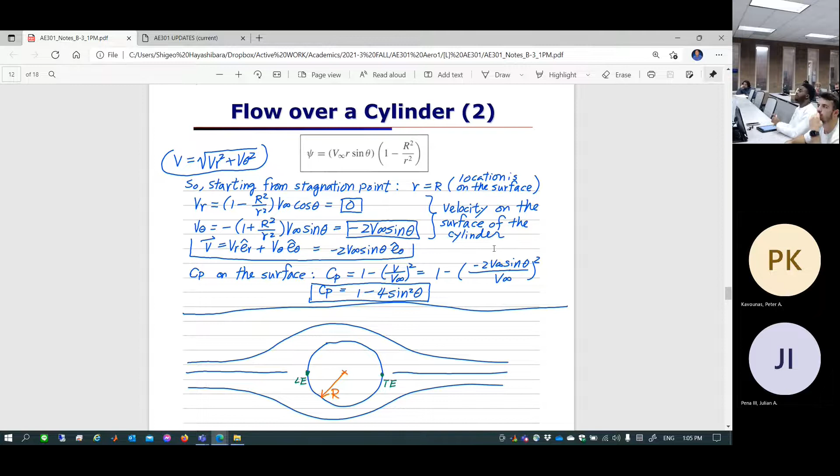So anyway, where did I stop in last class? I think we looked at flow over a circular cylinder without having any circulation in it. So this is non-lifting flow over a circular cylinder. Let me just put the memo here. Sorry, I forgot to connect my drawing tab. So this is something called non-lifting flow over a cylinder.

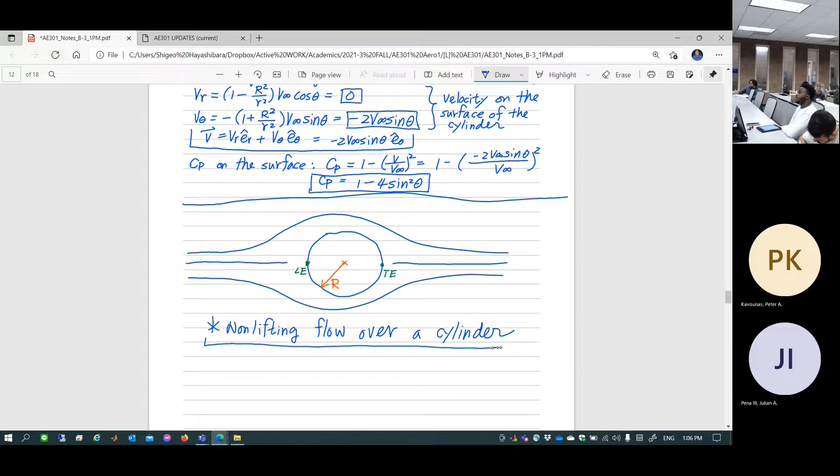Why is this non-lifting, by the way? Somebody please give me a straight answer. This one doesn't have lift at all. Why? No circulation, you're saying? Oh, that's great, actually a very good description of why you don't have lift, because you have no circulation in the flow field. There's no mechanism of creating any circulation in the flow field. Would it also be accurate to say that when you integrate the pressure distribution over the surface, it's equal to zero, because the pressure distribution in a certain direction is completely symmetric? Yeah, you can say that too. And then you can say that because we have no circulation, we have such a pressure distribution.

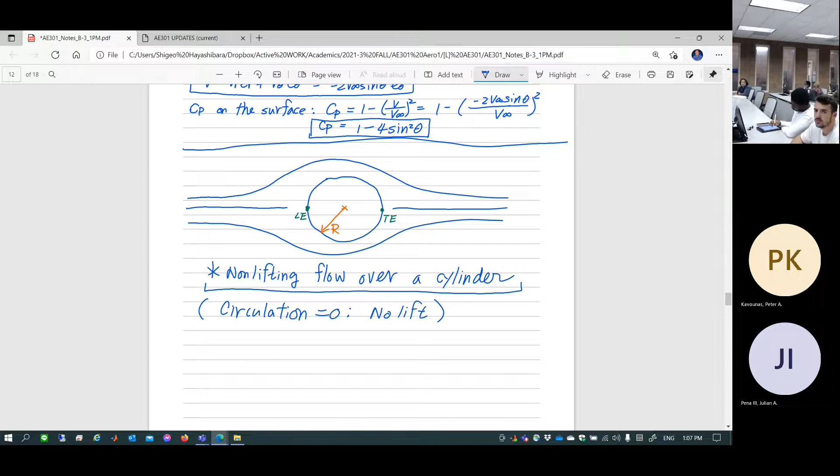So this is actually the very first fundamental idea of the theory of aerodynamics, circulation theory. Circulation is zero, no lift. You can apply this theory exactly as it is to the flow over a cross-section of a wing. It's called the circulation theory of aerodynamics, of German origin. Prandtl, Ludwig Prandtl, is the one who actually developed this whole thing. So we are going to refer more and more to his name, and lots of things called Prandtl's fluid mechanics or fluid mechanics theory developed by Prandtl. This is Prandtl theory of aerodynamics, a very classic theory, which this country actually accepted right after World War II.

Aerodynamics in this country, the United States, is based on German theory. Interesting, and then Japanese professors teaching that. Interesting, isn't it? How come you shouldn't say this? No more bad jokes.

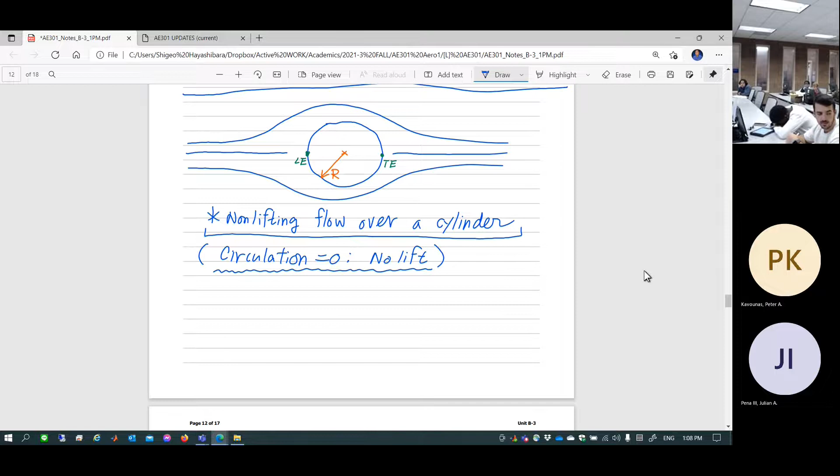Are there opposing commonly accepted theories for wing lift, say? Some people actually pick up Newton's impact, like a third law of motion, Newton's action-reaction kind of theory. Occasionally they do, we don't. However, circulation comes down to being the similarly commonly accepted theory for lift worldwide, so some details will be different. But we adopt almost as-is the Prandtl theory.

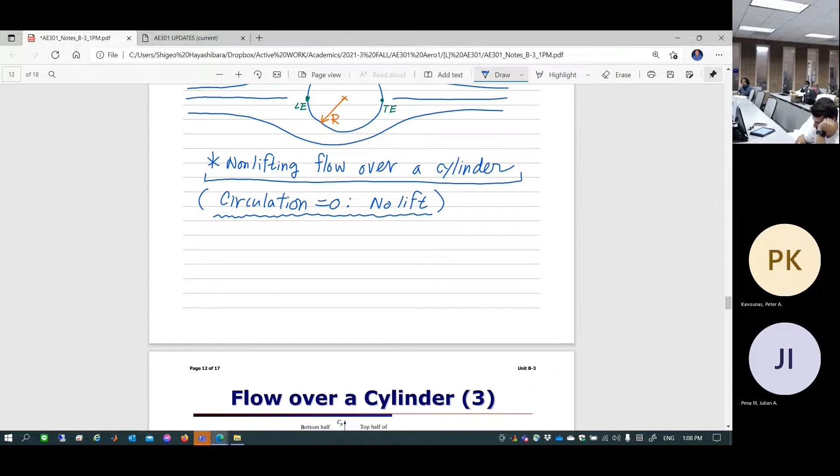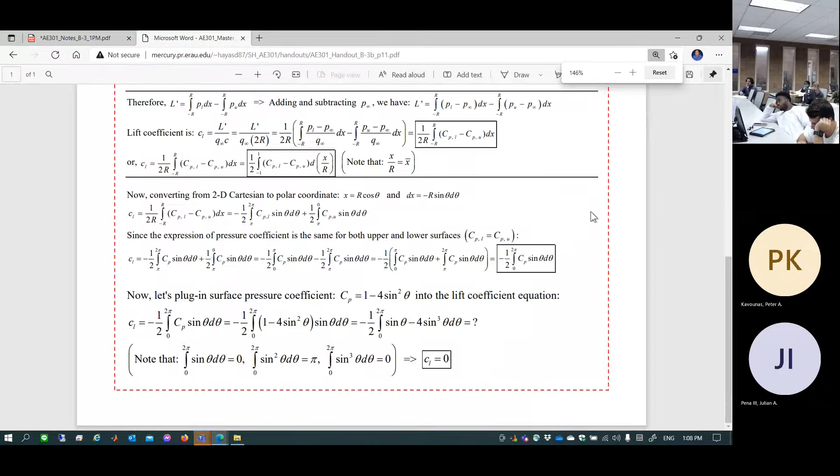So now, remember last class we introduced a handout, quite an important handout. Basically lots of people probably ignore this handout, I know that, that's why I'm telling you right now. This handout's contents may all of a sudden show up on the final exam, be ready for it if so. So this is quite important mathematical detail, I want you to go over it. So if there's no flow circulation in the flow field, this is the pressure coefficient distribution over the surface of the non-lifting flow of the circular cylinder.

Is that correct? Non-lifting means circulation is zero, flow over a circular cylinder.

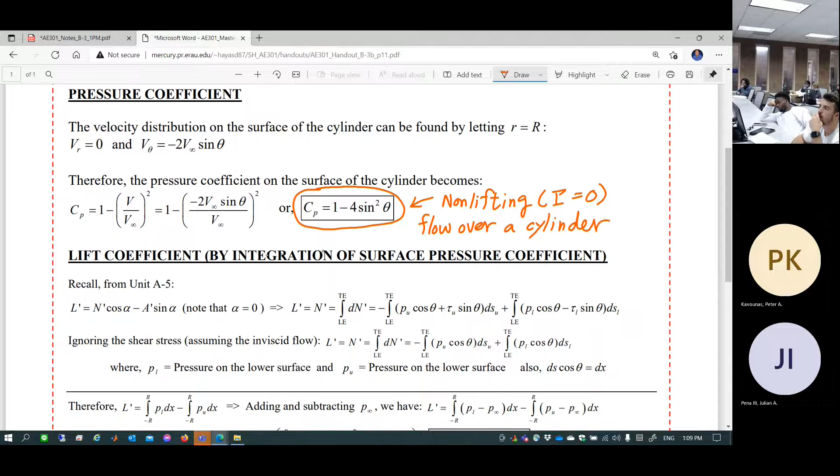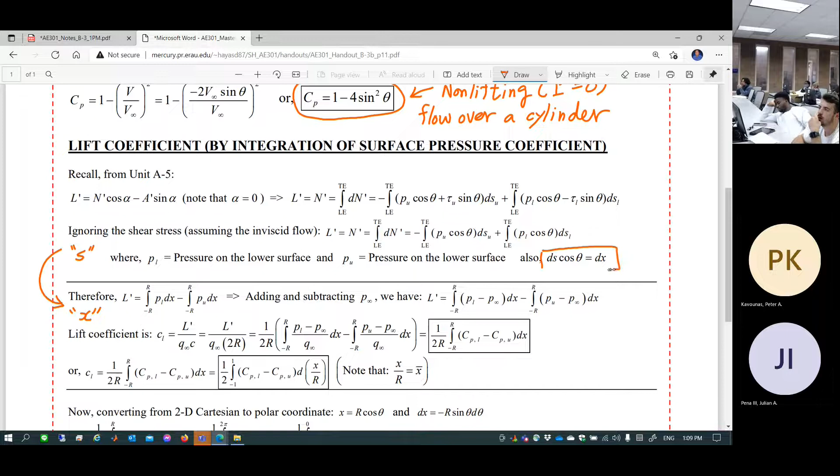Then, of course, you went through twice the coordinate transformation process. This is the coordinate transformation, streamline coordinate S into the Cartesian coordinate X using coordinate transformation. Then you come up with the CL lift coefficient equation, which can be given by integration from leading edge to trailing edge of the CP distribution difference between top and bottom surface, which gives you lift. Of course, if you do the CP distribution difference between forward and backward surface, you can determine the drag.

So this is only the lift coefficient, but you can, of course, compute the drag coefficient also. With the same token, you can determine the pitching moment, say pitching moment at the center of the cylinder, which is half chord, is of course zero. You can compute CL, CD, CM at any location along the chord.

Now chord in this case is of course 2 times radius, right? So this is leading edge and trailing edge. This is radius, so the chord, I keep saying chord C, chord C is equal to 2 times R. This is diameter. Now you can compare against actual cross-section of a wing. Oftentimes we refer to the leading edge and trailing edge, and then connect up the straight line. This is called chord length, right? This is a chord. In this case, chord is 2 times radius, because we are using radius as a normalization factor of x.

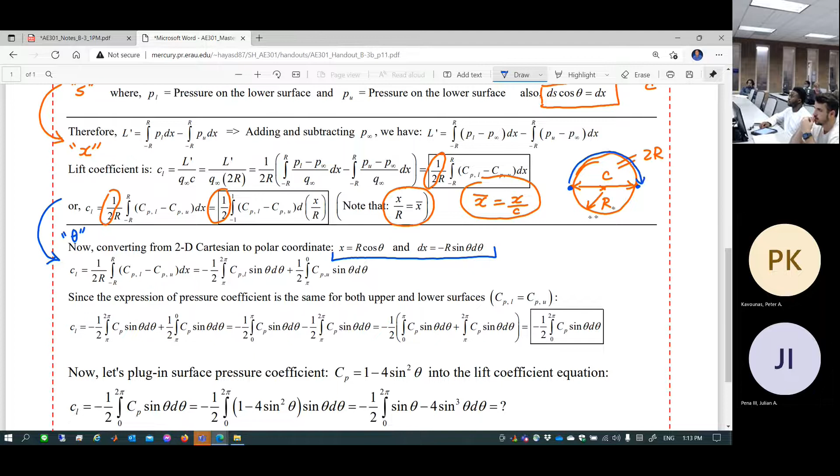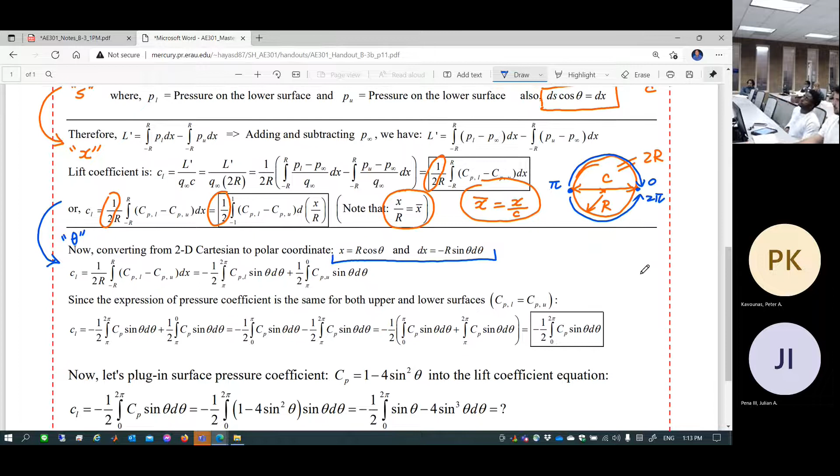That's quite important. So next step is, of course, the second time transformation of the coordinate. Now you're going to transform Cartesian x into theta, which is polar coordinate, using this as a transformation equation. Then you are going to integrate from leading edge to trailing edge for upper surface and lower surface. Theta equal to, this is pi, theta equal to 0, this is 2 pi, right? So you are going to integrate lower surface and upper surface, take a difference between the CP distribution. Now CP distribution is this, a function of theta, okay? So you can finish up your integral, go through this mathematical operation, and the result is CL is 0.

That's what we did. Okay, so we're going to move on from this page forward. Any questions so far? This is just mathematical detail, quite important, to compute actually the lift coefficient using the distribution of surface pressure, okay? Because when you start using your software, this is exactly what the software does. Software computes the surface pressure CP distribution from leading edge to trailing edge and product. And then next thing is you're going to integrate over upper and lower surface to determine lift coefficient out of it. Okay, this is the exact same process, mathematical details.

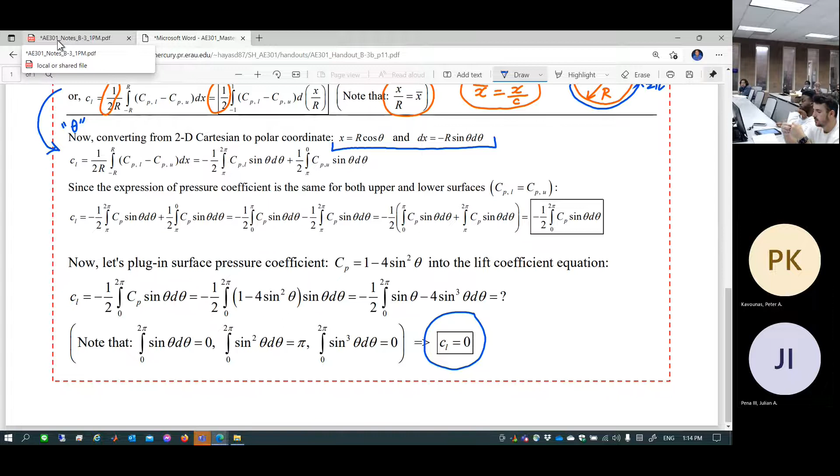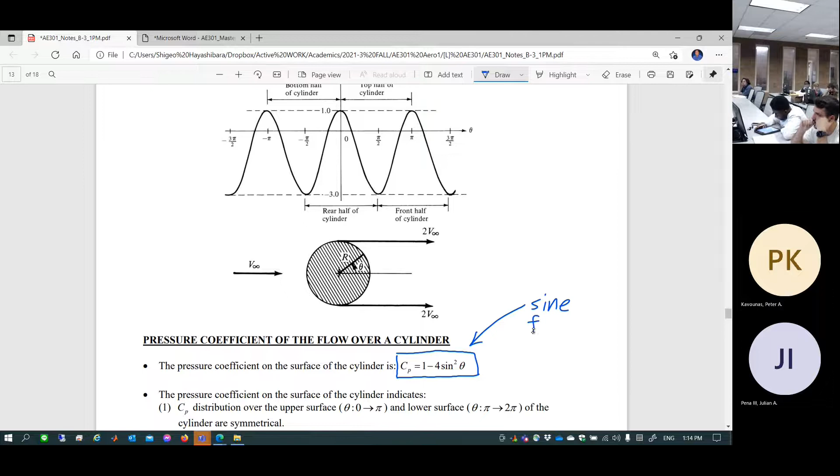So moving on to the next page. Okay, so let's just take a close look at the meaning of this CP distribution of the non-lifting flow over the surface of the circular cylinder. So this is, interestingly, a sine function, right? This is a pure function of theta, of course. And then you're talking about the CP distribution over the surface.

So suppose if you plot theta starting from here, theta equal to 0. This is theta equal to 0. And then let's trace out what is the CP distribution over the upper surface. Theta 0 all the way to, let's say, pi. Theta equal to 0, theta equal to pi. This actually traces out the upper surface pressure distribution. So you're looking at right here. So theta equal to 0, CP is 1, right? And then you're going to trace out all the way to pi.

Here, yeah, so this is theta equal to pi. So theta equal to pi, you're going to have another CP equal to 1 location. So this is a stagnation point.

It's a stagnation point. And then halfway through here, this is theta equal to half pi. CP equal to, oh, looks like minus 3. At this location, surface velocity is maximum value, 2 times original V infinity incoming.

So this is velocity zero location. Velocity is decreasing. Velocity zero. Velocity actually starts increasing at the same time.

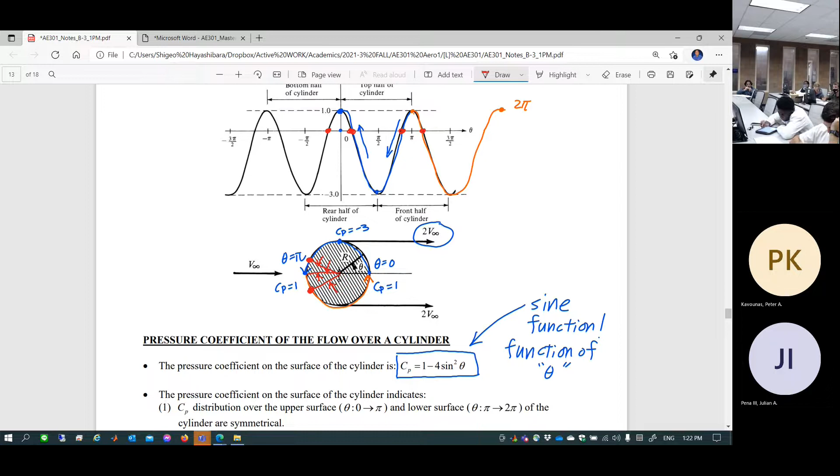So again, if you take a look at surface pressure distributions, you can basically tell the pressure distribution on upper and lower surface, forward and backward surface, are completely symmetric. So it's impossible to create a lift or drag, okay?

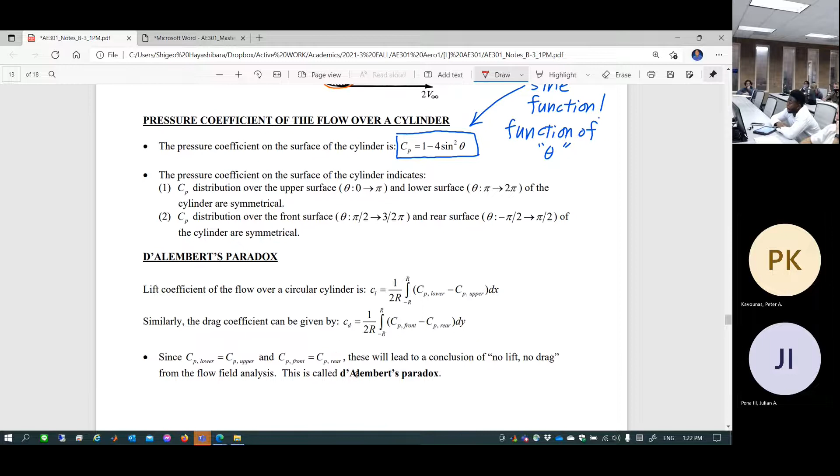So this is called non-lifting flow over the circular cylinder, d'Alembert's paradox. Because people don't believe you saying this flow doesn't create even drag. Why is that? Because we are completely ignoring some physical phenomena, physics out of it.

This is ideal flow. In ideal flow, you include assumptions such as viscosity is 0, density is constant, this is steady flow, zero gravity, and even irrotational in a mathematical sense. So from those assumptions, this is the solution.

Is this a completely wrong solution? No. It just doesn't include some of the physics that actually produce the drag. So if you understand that physics, you can compute it in a separate system or software, attach that result onto this one, and then you can actually reproduce something more meaningful - a real flow field.

That's the approach of aerodynamic theory. Without theory, you cannot predict anything, right? So some kind of prediction is a baseline solution, but the baseline solution oftentimes ignores some of the physics.

So in this flow regime, you can no longer assume density is constant - that means more than 0.3 Mach number. So let's just compute the density as a variable, and then superimpose that result into this original baseline solution. That is going to produce a simulation of high-speed flow.

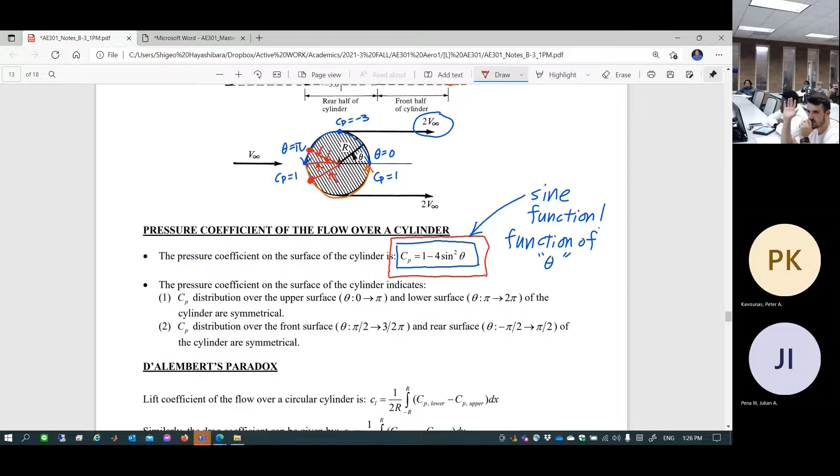Okay, so anyways, question - go ahead, can you scroll up a little bit on that diagram? How come you have V infinity coming in, but 2V infinity coming out of the top and bottom? You can compute that using math. You did it, actually, by the way - didn't you do that? Look at this.

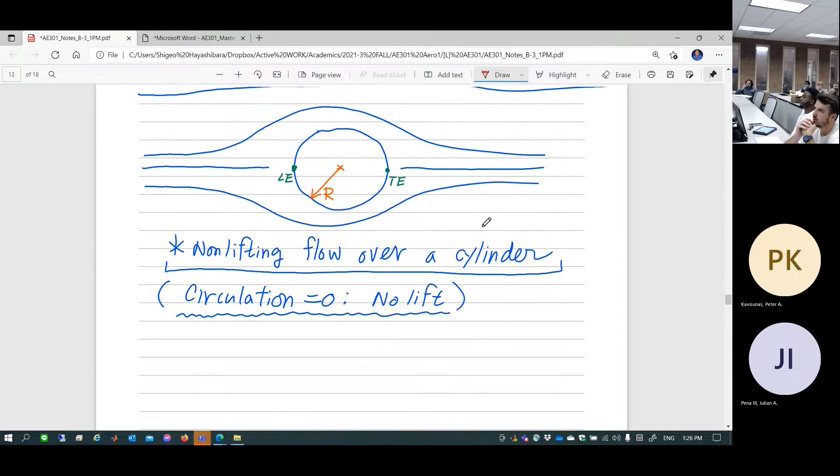Suppose you plug in sine equal to half pi, it's going to be 1, right? Minus 2 times V, okay, that's what you get. Well, actually, minus sine pi - what's that? Minus 1, is it? Something like that. So you get 2 times V infinity sine, 2 times V infinity.

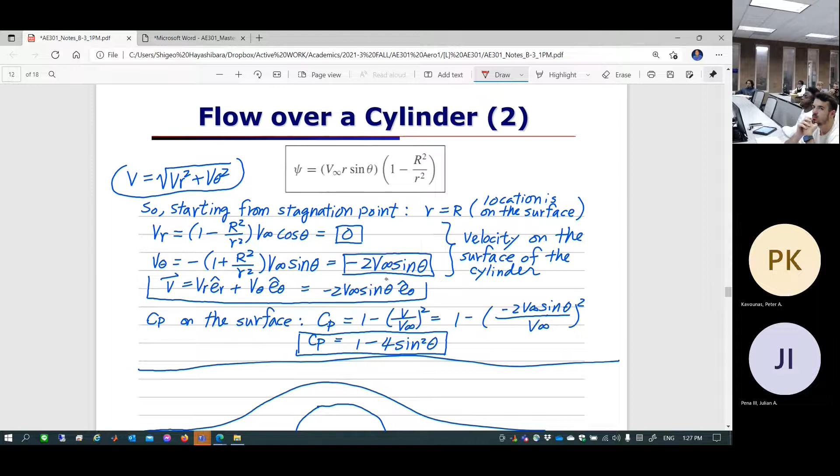Use this equation, you can determine the velocity on the surface - a mathematical solution, you get it. Anything else? You can determine any velocity at any location, it's a function of theta, right? It's 100% math, that's what we are doing. Any other question?

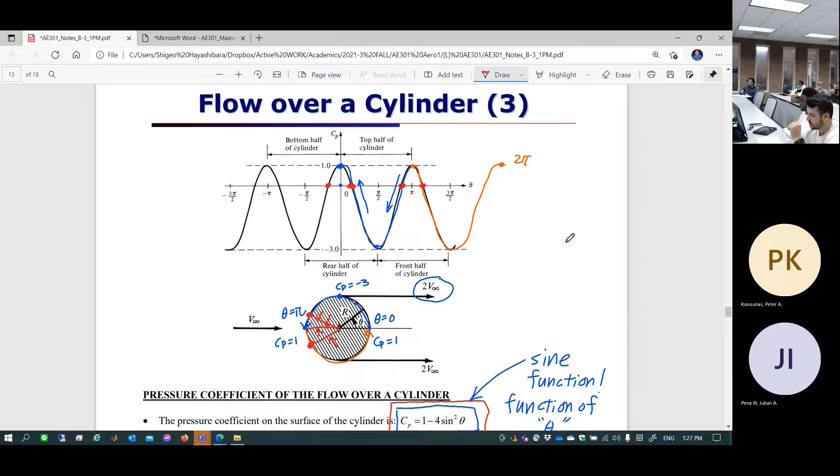Okay, good. So this is the question. Consider the flow over a cylinder, over the surface of the cylinder, and calculate the locations where the surface static pressure becomes equal to the free stream static pressure. What kind of location is that?

What kind of location do we call this? If we make a drill hole, what kind of location is that? This is static port. It's not, it has nothing to do with statics class, okay? Please.

P goes to P infinity. So surface pressure P, actually Cp, is a function of theta. We know Cp is 1 minus 4 sine squared theta. Is that right? Cp as original definition is P minus P infinity over Q infinity, isn't it? Right. So if P becomes P infinity, Cp equals 0 here.

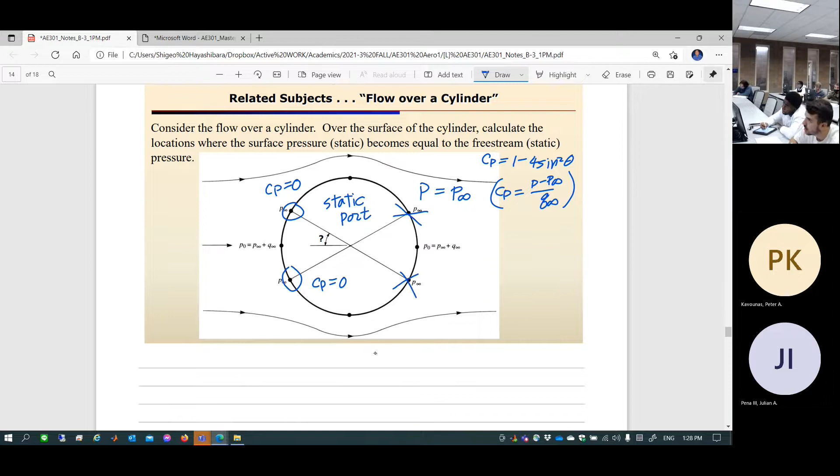Now this is the other side of the flow field, so this is forward surface, backward surface. These locations, mathematically you can find it, but realistically we cannot use it. We can only use the forward surface. So let's just find out.

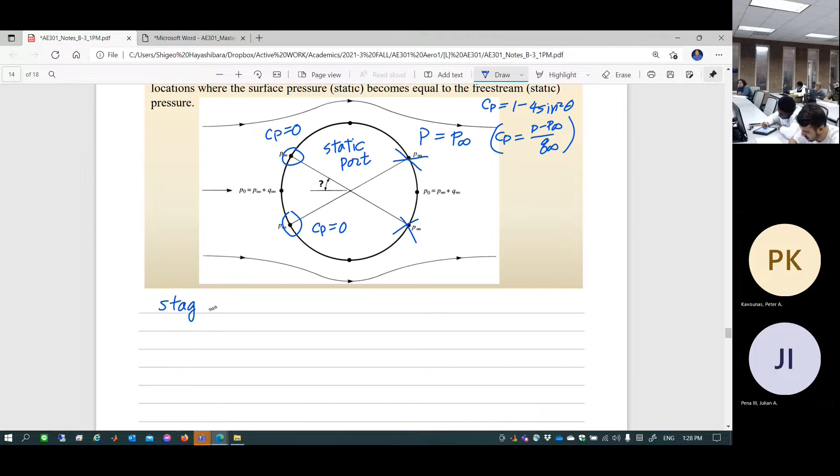So at the stagnation point, what is the Cp? Cp is 1. How come is that? Well, Cp is equal to P minus P infinity over Q infinity, where at the stagnation point V is equal to 0. Then Cp is... how come Cp is 1?

We have, isn't Cp equal to 1 minus V over V infinity squared? So what happens to pressure P at the stagnation point? It's equal to pressure P becomes P0. So P0 minus P infinity divided by Q infinity. So if you plug that in, what's P0 by the way?

P0 is the total pressure. What makes total pressure? P infinity plus Q infinity. That's right. Subtract P infinity, divided by Q infinity. What is it? It's 1, because this becomes Q infinity over Q infinity. So at the stagnation point, Cp is 1. Obviously, this is the highest possible Cp value you can have in the flow field.

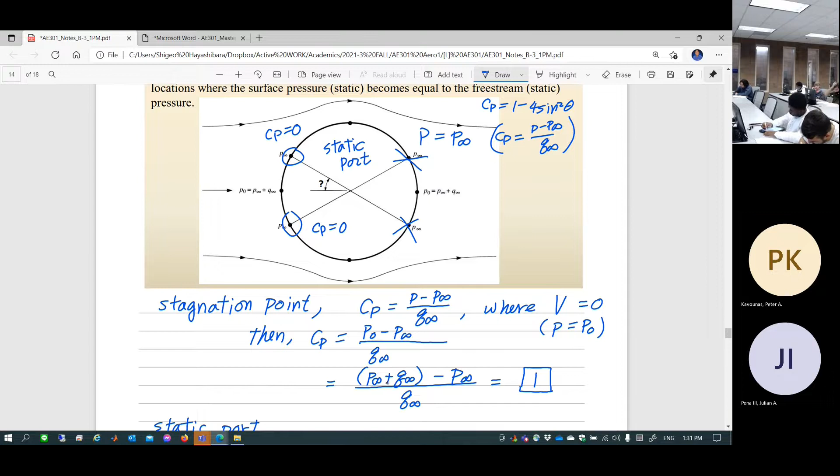So velocity becomes 0, then pressure becomes total pressure, which is static pressure plus dynamic pressure of the free stream. Now, static port is the location where pressure becomes P infinity. So then if you compute Cp, Cp is going to be P infinity minus P infinity over Q infinity, so this is 0.

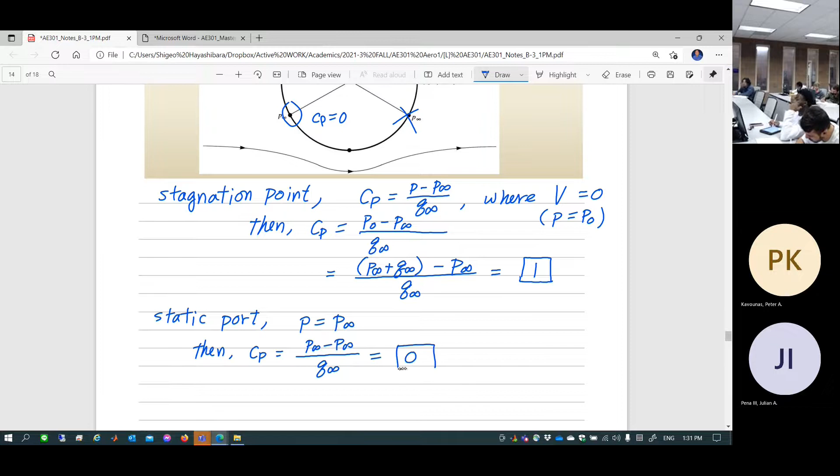So if you want to find the theta corresponding to it, we know Cp is equal to 1 minus 4 times sine squared theta. Let's set that equal to 0. This gives you sine theta is plus and minus 1/2. This gives you theta as multiple solutions: 30 degrees, 150 degrees, 210 degrees, 330 degrees.

Which one do you think you choose? 150, 210, that's right, those two. Those two are the forward surface. So that's the location. 150 and 210 literally means this angle here is 30 degrees up from the center, 30 degrees down from the center, because this is measured from here: 150 degrees, and then this other one is 210 degrees. So those are the two meaningful locations of the static port.

And then, what is the Cp corresponding to? Also note, Cp is 0. Also note Cp at the minimum, Cp at P min or P max location.

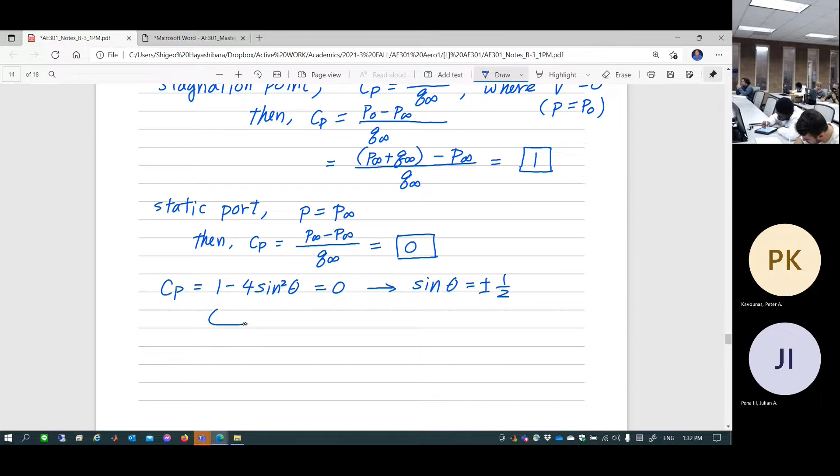So let's find out. The location where the Cp becomes lowest, or velocity becomes highest - this is a minimum pressure location or maximum velocity. Also here is minimum pressure or maximum velocity. What is that angle-wise? Theta equal to half pi, right?

So you can plug in Cp at that location. Cp is equal to 1 minus 4 times sine squared theta, with theta equal to half pi. This gives you minus 3. So Cp at the pressure minimum or velocity maximum point is minus 3. Obviously, if you plug sine of half pi into the velocity equation over the surface, it's going to be 2 times V infinity in magnitude.

So, of course, V max is equal to 2 times V infinity. Again, you know the location of theta. Theta is half pi, or minus half pi, or 3 over 2 pi, either way. Any question? This is very simple math, and then I wanted to show you one thing.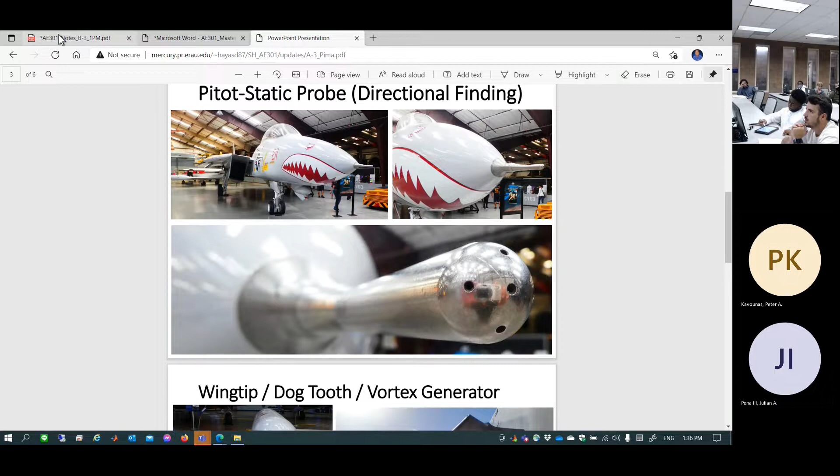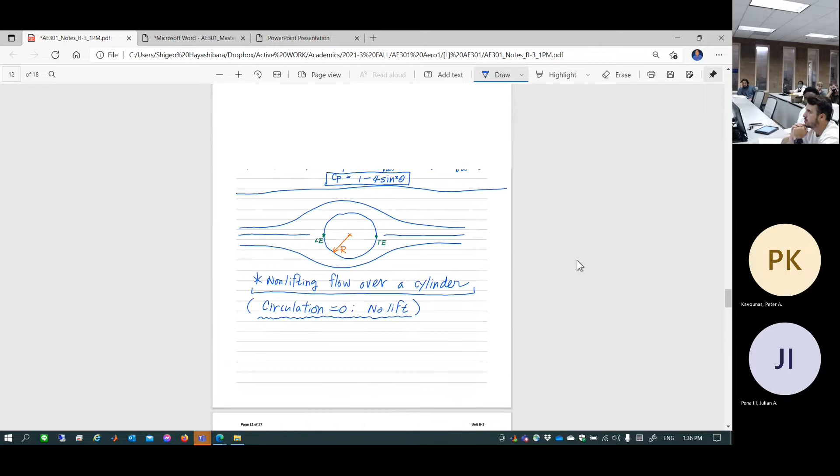Question here. Go ahead. How do you get the V max? Well, like I said, this is the third time saying it. This is the equation you know already. Plug in theta equal to half pi, and you get V max equal to 2 times V infinity, right?

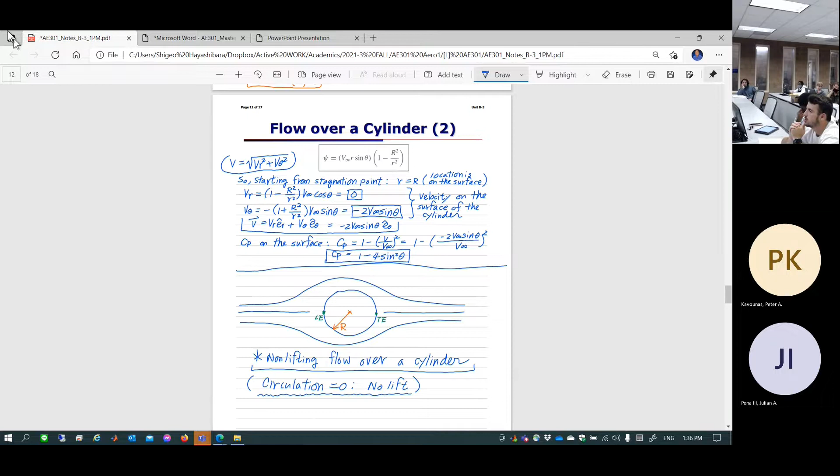Okay, any other question? So if you take a look at and compare the ideal versus real flow field, let's just for a moment start taking theta from the stagnation point forward surface. So right here, you are going to start from the stagnation point, forward surface right here. Cp equal to, of course, 1, okay?

Then as you move along the surface right here, pressure drops and crosses zero. In other words, this is the static port. And then it goes all the way to the 90 degrees minimum pressure point, Cp equal to minus 3, or maximum velocity point, minimum pressure point right here. And then if you go beyond that, pressure actually starts increasing and increasing. Go back into Cp equal to 1, another stagnation point here, flow away. I'm just looking at the upper surface right here.

Now, this is the ideal flow solution, 100% mathematics. Let's compare against the real thing. Does that actually represent some of the physics of the real flow field? Yes, it does. So the real flow gets in here. Once again, Cp is also 1. Then as you move along the top surface, of course, you're going to decrease the pressure, and pressure, and pressure, creating a minimum pressure point right here.

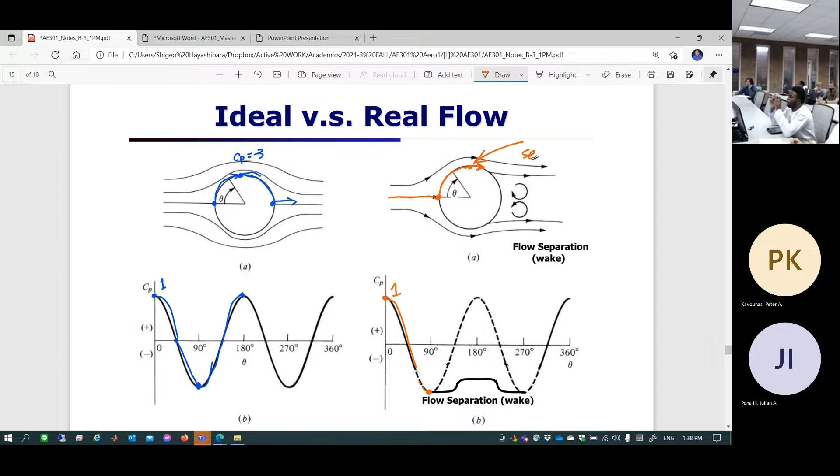Drag due to flow separation. If the airplane is pitching up really high, you're going to induce flow separation here, creating huge drag, and the airplane cannot sustain flight. What do you call that kind of situation? It's called the stall, airplane stall. Flow separation causes airplane stall. This is separation drag, or pressure drag, drag due to flow separation.

There's a reason for that little bump in your pressure coefficient. Is that because the vortices turn into the middle? That's probably circulation, lots of things going on here. Flow separates, circulates, but because of the circulation where it hits at theta equals 0 or 180, probably. Is that where you get that little lift? Probably, but we shouldn't explain it with such a simple method because the flow is very turbulent, very random. Flow separates, creating a wake, which is very random, chaotic flow.

So this is the real flow field. At least we can represent the actual flow field until it actually separates, because the ideal flow cannot simulate any flow separation since we completely ignore that. What causes the flow to separate? It's the boundary layer, viscosity needs to be in place. And the viscosity's characteristics, either laminar flow or turbulent flow - what causes the transition from laminar to turbulent needs to also be properly analyzed, otherwise you can never represent that kind of stuff.

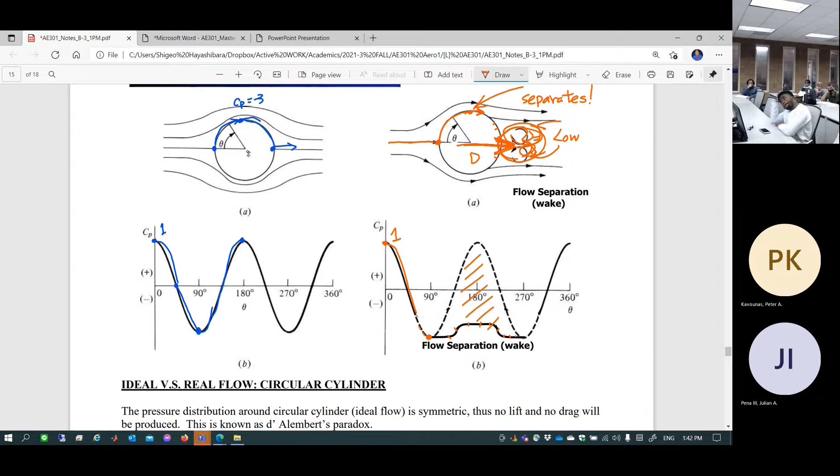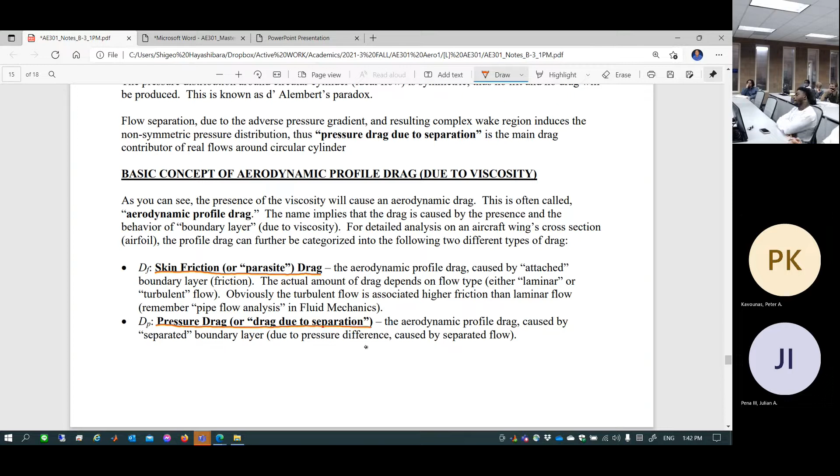Now, flow separation creates drag, that's called pressure drag. Also, even though the flow is attached here, it is going to cause friction because viscosity is also included, so that is also completely ignored here. Two different kinds of drag we completely ignore: one is skin friction drag - even if the boundary layer stays attached on the surface, it is going to cause friction, tau equals mu du/dy. The other is pressure drag - flow separates, and that actually creates a much larger amount of drag than skin friction drag. So those two combined together is the total drag, CD. CD is equal to CDF plus CDP.

This is a 2D airfoil, something called drag polar. This is an aircraft wing, or it could be the aircraft itself - 3D drag polar. Drag polar is something you have to figure out when you start taking flight mechanics. What is the drag polar? That's quite important because it determines your aircraft's performance - how long you can continue flying, how much you can climb. Everything depends on this drag polar. So drag polar is an important term you have to figure out.

One of the tools available will be XFLR5, it's going to compute the drag polar for you. Another tool is the wind tunnel, you have to compute drag polar there. XFLR5 is, of course, a theoretical method. Wind tunnel, of course, you can do that too. Or CFD - oh my goodness, this is challenging, but you can still do it. This is flight mechanics, wind tunnel testing class you're going to take. This is CFD, if you want to take it, I can create one for you.

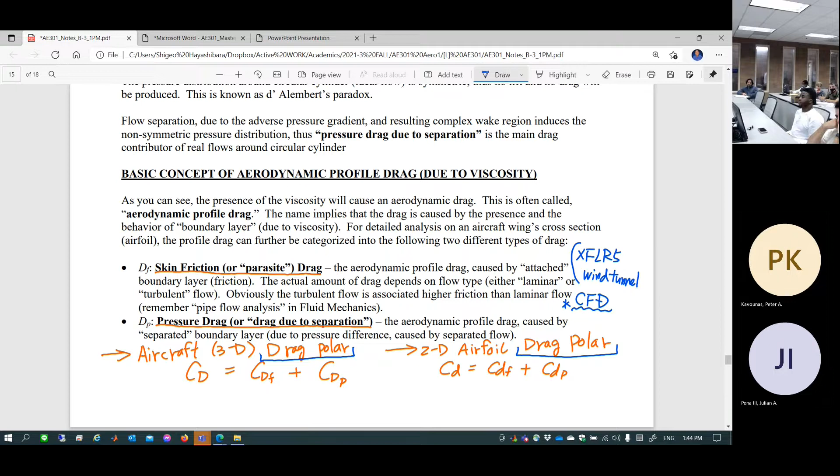Have you ever seen a physics festival or something, where somebody shows you a demo with very viscous fluid and a steel ball? You drop it into the very viscous fluid and it slowly goes down. That's what it is. Skin friction only, no flow separation.

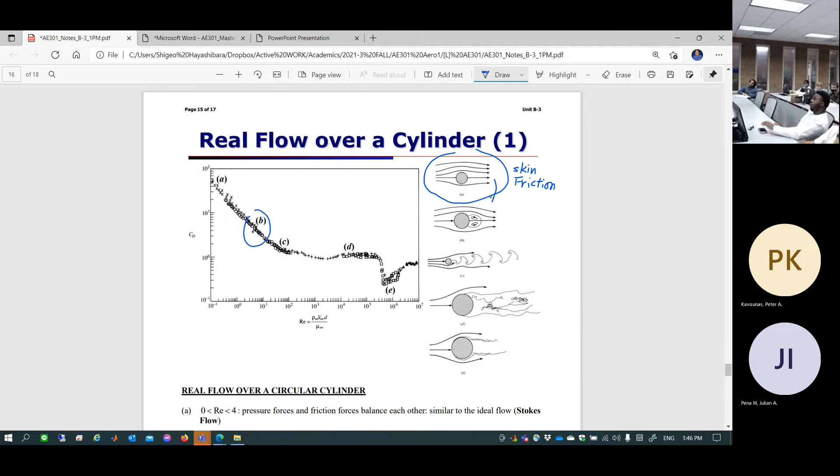Now, right around this Reynolds number range, you are going to start seeing flow separation here. This is a very interesting flow separation - flow separates, however it creates a separation bubble, reattaches here, and keeps circulating. This is a separation region, but the separation region stays attached on the surface. This is called a separation bubble.

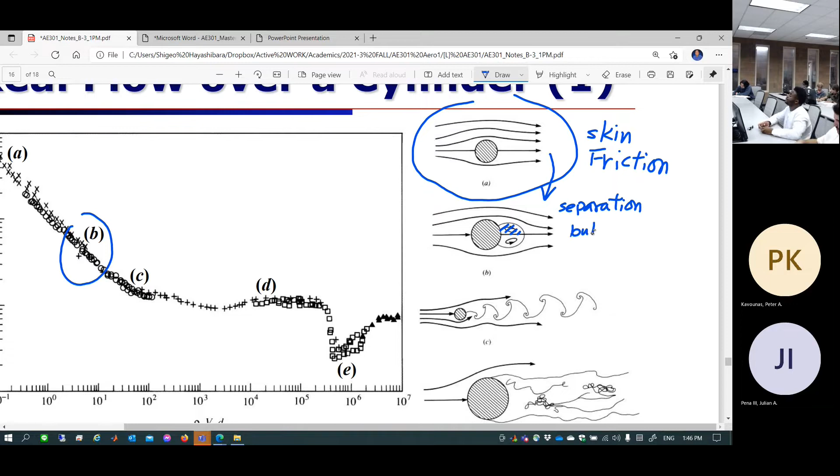Two bubbles form the separation bubble. If you increase the Reynolds number more, those two separation bubbles start to separate from the surface, alternatively shedding the vortices. It's called von Karman vortex shedding, named after someone. That's in this range of Reynolds number.

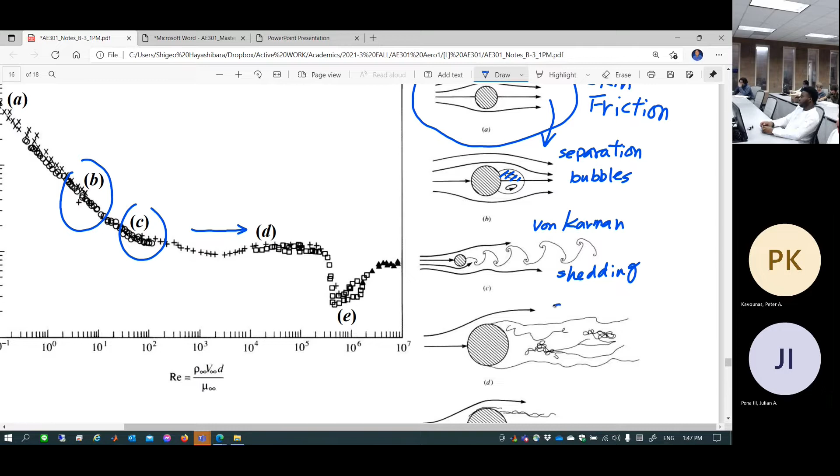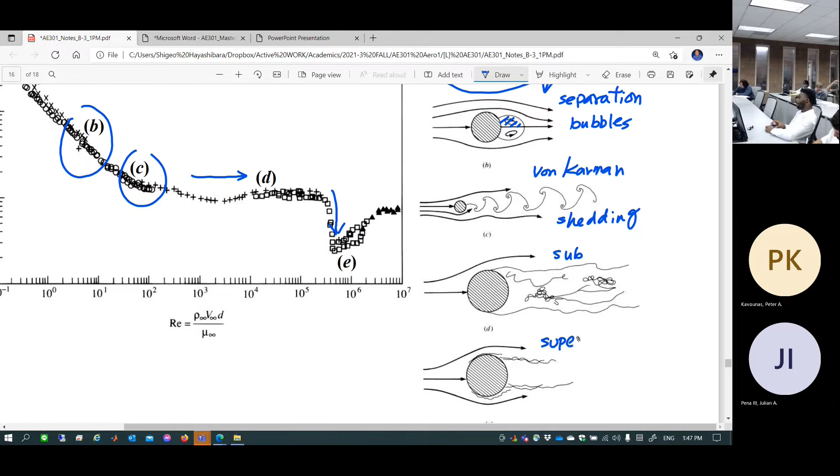Now, if you increase the Reynolds number further, this shedding becomes much more random and chaotic. This is called subcritical flow separation. And then something happens right here, a sudden dip - this is supercritical flow separation. What are those differences?

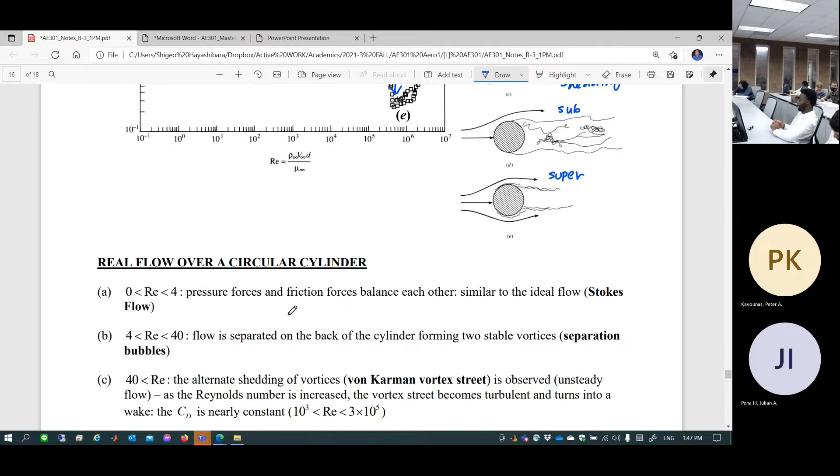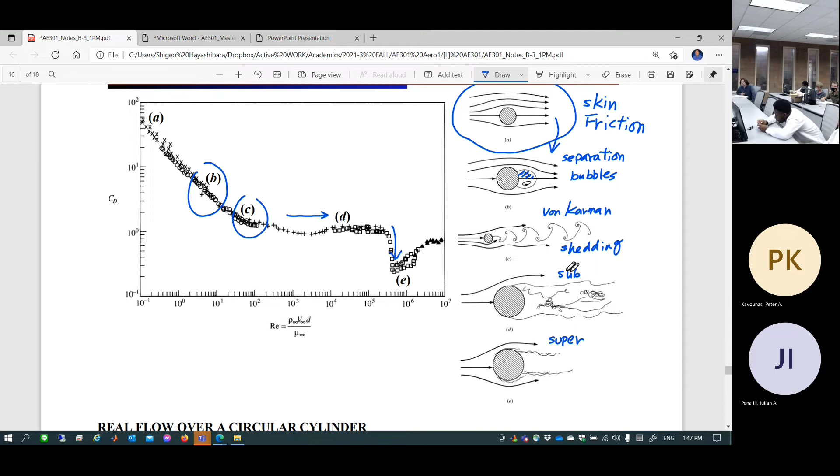Question: does that major drop that occurs happen due to stall? No, this is flow over a cylinder. So again, this range of Reynolds number naturally transitions the flow from laminar to turbulent.

So that's the next page. This is called Stokes flow, very creeping flow - Stokes flow. The other one is von Karman. This is von Karman, this is a separation bubble.

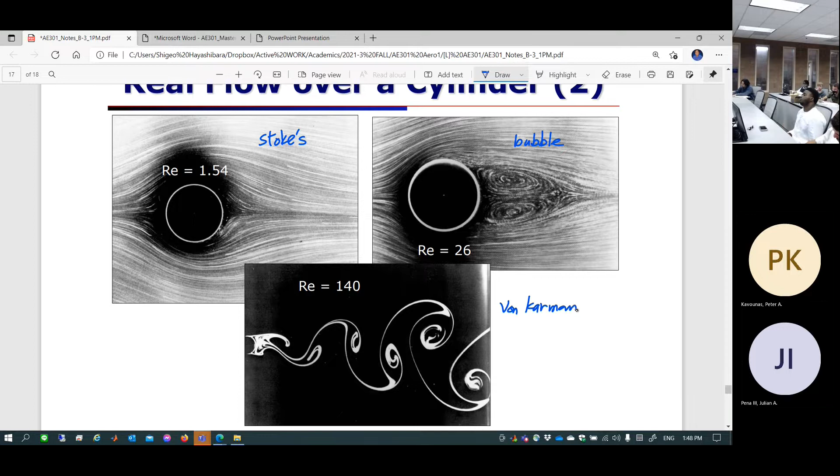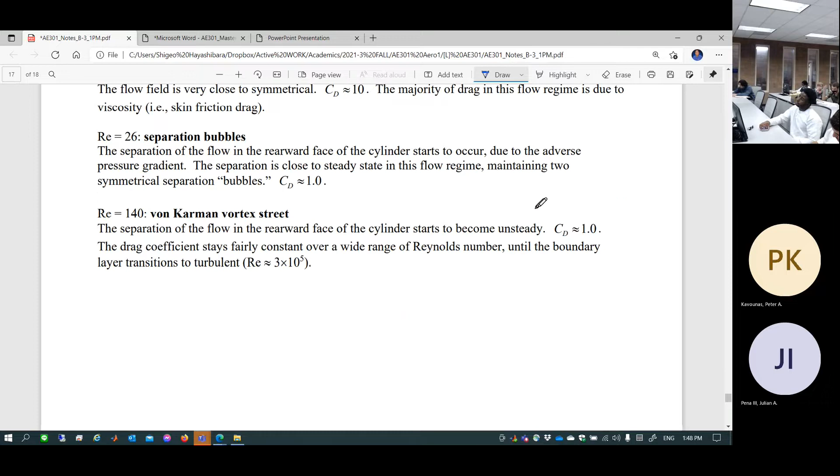Stokes flow, or creeping flow, either way. So everything is given here - those are the drag coefficients. And here are the two things: one is subcritical flow, the other is supercritical flow.

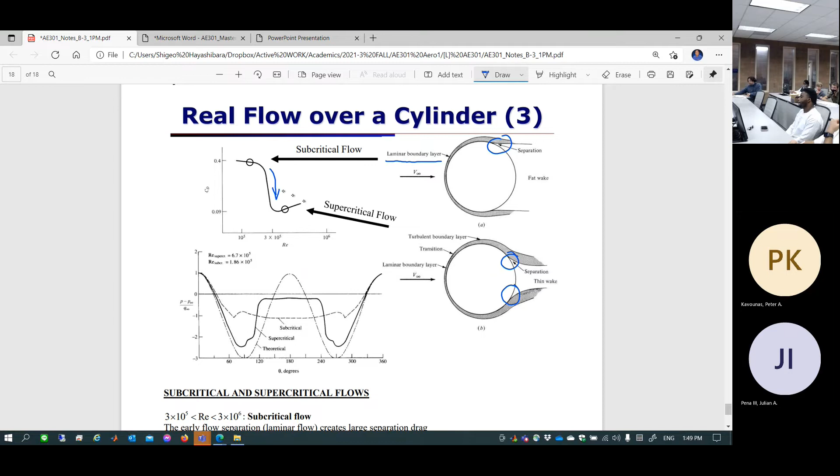Subcritical flow is where the flow separates early because it's laminar. The laminar boundary layer separates at an early stage whenever the adverse pressure gradient starts to happen. Flow separates all of a sudden, creating a huge wake. Now, if you increase the Reynolds number, the laminar boundary layer transitions to turbulent flow, which stays attached on the surface a little bit more. This delays the flow separation, causing the dip in the drag coefficient, and overall the drag coefficient decreases here.

One is subcritical, the other supercritical. Have you ever seen a golf ball? That's what it is - golf ball dimples are intentionally there to transition laminar flow to turbulent, so it stays attached more on the surface, delaying flow separation, so it flies a greater distance.

Is that what the vortex generators on some wings are? That's right, that's also true. You intentionally create turbulent flow by putting vortex generators on the surface. This increases skin friction drag, but it minimizes flow separation, minimizing pressure drag. Sometimes you have to do that.

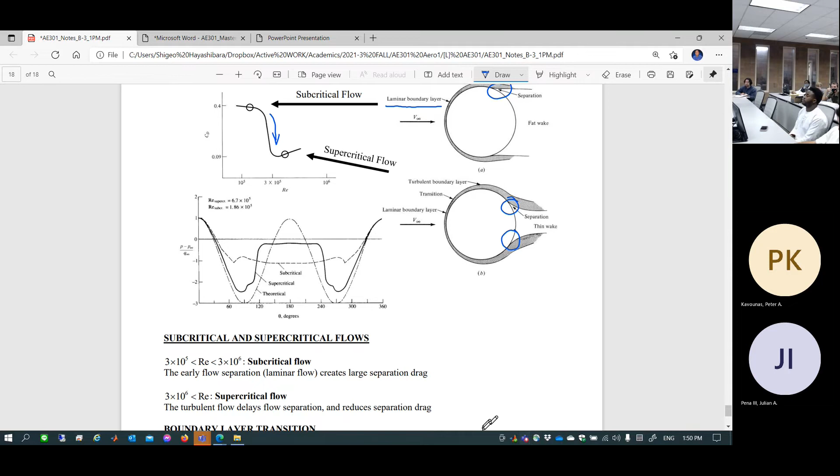And then people say, well, it's going to increase the drag. Yeah, skin friction drag, yes, but separation, no. Especially for high angle of attack maneuvers. So it's always a trade-off.